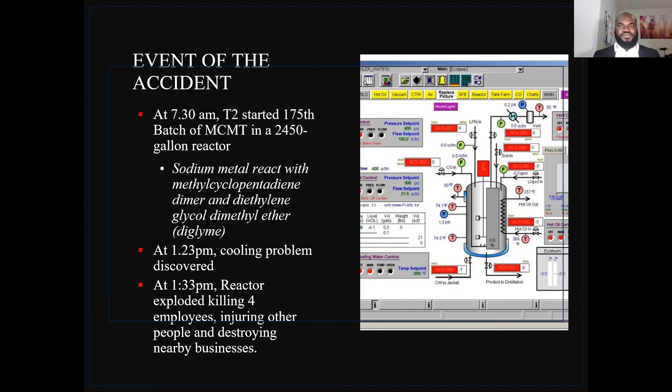The cause of the explosion was a runaway reaction in the MCMT process. The operator in the control room was unable to cool the temperature that came from the exothermic reaction. The runaway reaction was the second exothermic reaction, which is the decomposition of the diglyme solvent.

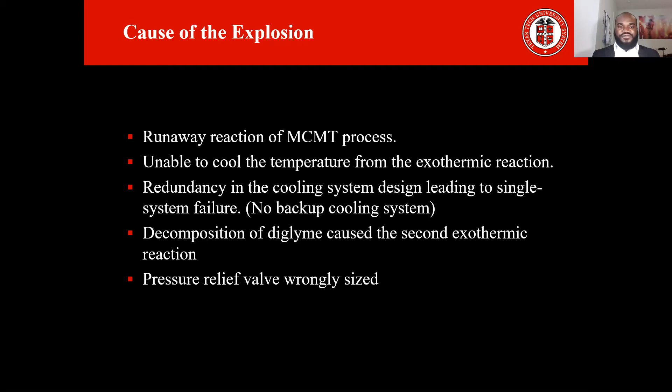There was also a lack of redundancy in the cooling system design. There was a single point of failure. There was no backup to the cooling system. The cooling system was only from the local community water in Jacksonville, and there was no backup to cool down the reactor if there was a possible runaway reaction. And we see here that the pressure relief system was wrongly sized, and we're going to talk about that later on.

The possible causes of cooling system failure: the water supply valve might have been partially closed, or it failed to open. The water drain failed or was partially open. There was a failure in the pneumatic system to open or close the valve. There was a blockage in the pipe, or there was an incorrect reading of the temperature. Maybe it was much higher than it was reading. There was mineral scale buildup in the cooling pipe.

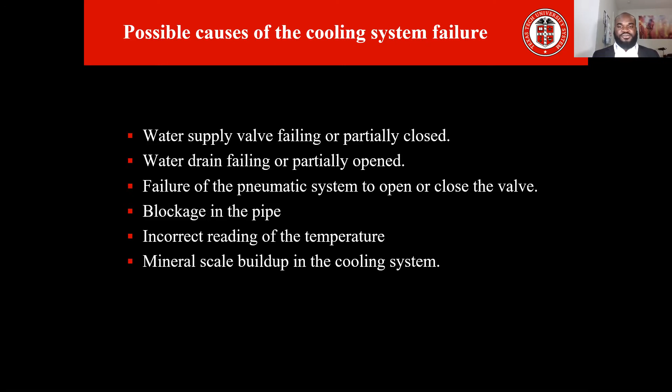So the owners of T2 Laboratory had made a lot of bad and poor decisions prior to this accident. One of them was that there was no record of hazard analysis when they scaled up from a 1 liter reactor to a 2,450 gallon reactor, and there was failure to size the relief device in case of a runaway reaction. So CSB reported that the relief valve was only sized for normal operation, so they were not considering a runaway reaction. There was no documentation that supported or showed how the relief valve was sized.

A prior exothermic reaction incident was not properly corrected, and they only changed some of the reactants used in the process. Neither owner had reactive chemistry experience. Although they had degrees in chemical engineering and in chemistry, and they had also worked in the chemical industry, they had never had to deal with reactive chemistry. And they were unable to identify the hazard behind the reactivity of their production.

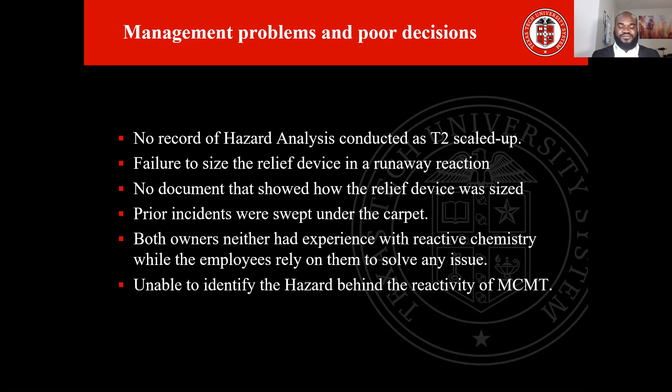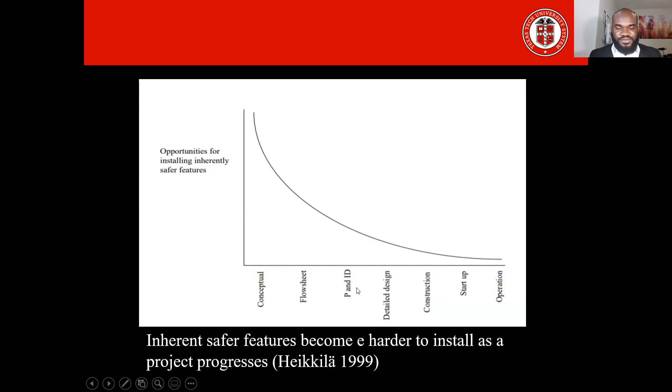And we can see here that inherently safer design is very important during the conceptual period of a design process, and it becomes harder as the project progresses. There are a lot of opportunities in studying inherent safety from the conceptual period to the flow sheets, and when it gets to the P&ID stage, it becomes harder, and so on.

My recommendation is that contractors should be allowed to be involved in the process design of plants. For instance, when the reactor was constructed, there should have been involvement of some contractors to be able to answer questions if something goes wrong. And also there should be an alternate route for the cooling system. Hazard analysis should have been performed when designing or changing the processes. So when scaling up, there should be another hazard analysis performed.

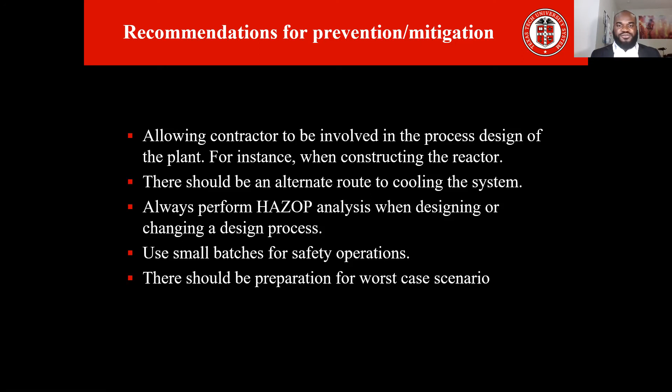And T2 should have used small batches for safer operations. This would have mitigated the size of the explosion that happened that day. And there should be preparation for the worst case scenario.

My conclusion is that T2 made a very terrible mistake of not performing hazard analysis when scaling up from a 1 liter reactor to 2,450 gallons. And also industry should implement management programs to prevent or mitigate catastrophic accidents. In these management programs, they should implement periodic training of operators. Process safety courses should be required to get accredited for chemical engineering or any engineering. It should be required for students, and for employees and operators in the chemical industry. And that's my review of the T2 Laboratory explosion.